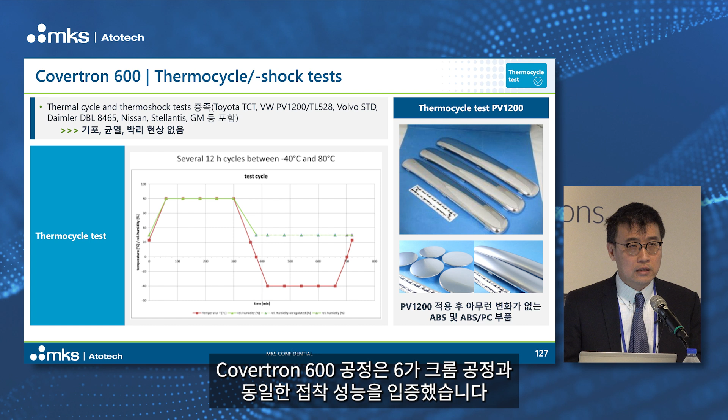The first question you will ask about performance is adhesion. We did a lot of tests on adhesion, like different thermal cycle or thermal shock tests according to different OEM specifications, such as Toyota TCT, Volkswagen PV1200, and various cyclic corrosion tests. We passed without delamination, without cracks, without blistering. All of this you can see in our slides, and it's proven that the adhesion is almost exactly the same, as good as the Chrome 6 application.

This is about compatibility with different plastic substrates, because many of our customers use different substrates in production, like ABS, ABS-PC, or even 2K, 3K materials. We have been testing this for almost a few years and created a database of different substrates. I cannot say every substrate works with Covertron 600, but I think the compatibility is quite good, and we can use the same process for different substrates.

So it means that for ABS, ABS-PC, we need only one process. And I think that's very important for automotive application, because most of the substrate that we are using today is ABS or ABS-PC with different content, with different PC content. So this process, Covertron 600, is able to plate different substrate with one process.

And also we have pilot lines in Germany and in China that will be able to help you really test your substrate to prove that it's working with our process.

This is a production process which is already working for many of our customers. In the past few years, we have installed more than 20 customers with Covertron 600. A few of them are in real production, not testing phase, but real production. That means every day 100, 150 liters.

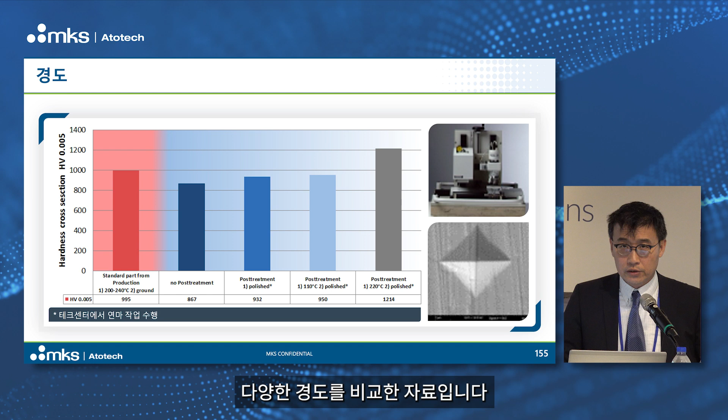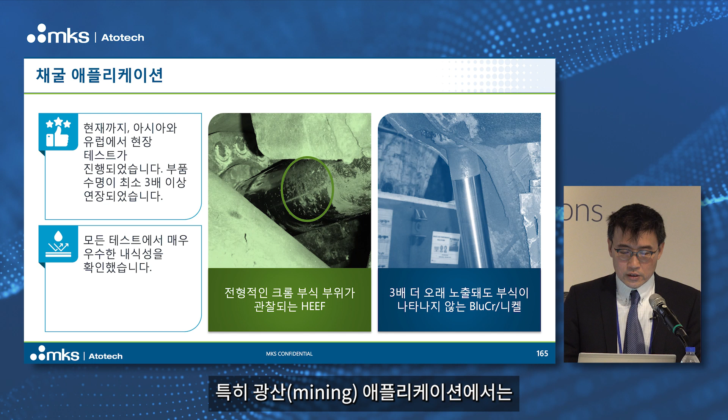We already have some applications and real industrial examples testing our BluCr. For mining applications, because of the better corrosion performance, the test shows that using BluCr with nickel really gives better corrosion resistance in real industrial application.

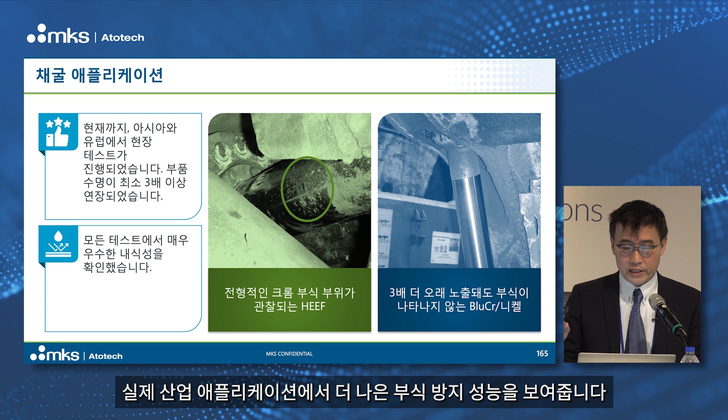You can see we are plating different parts with BluCr, with different geometry and different applications, and it all works. The challenge for different geometry in functional Chrome is there, and we see a great variety of parts to be plated. We've done a lot of sample platings already, which proved the process is working for different substrates and geometries.

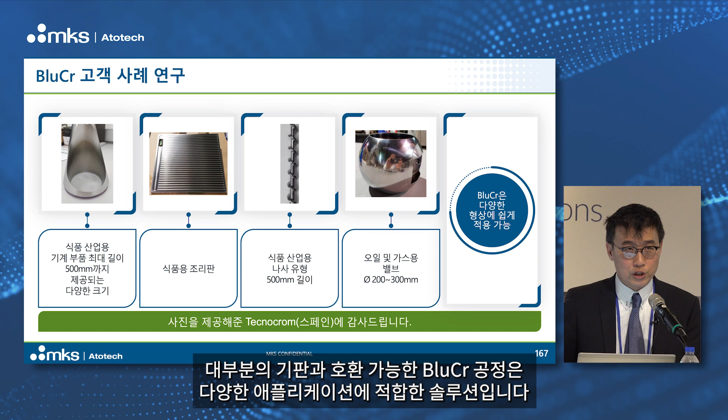That's the BluCr process, which is compatible with most substrates and different applications. We are using this BluCr in different parts, like hydraulic parts, and we already have some customers in production. We also have different standard automotive parts like brake pistons, piston rings, and engine valves—those are all applications for the BluCr chemistry.

We have different applications where general wear and corrosion requirements are needed, and especially we emphasize the high chloride containing environment, where compared to traditional hex Chrome it's outperforming. This is an example application with an engine valve, which is normally a high current density application for Chrome 6 plating, and we're able to outperform Chrome 6 with BluCr.

I'm not going into details because of time, but we can use the Q&A section, or discuss in detail later if needed.

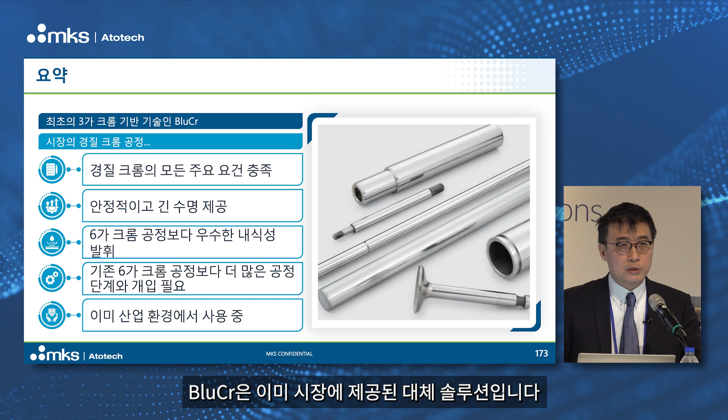As a summary, BluCr is again a production-proven process, which is available in the market as a replacement for Chromium 6 application, and it's stable. It can offer really similar performance compared to hard Chrome application, and can even offer better corrosion resistance in some special applications. So this is a replacement already in the market for you, and that's the summary.

Non-PFAS application. So the next topic is about non-PFAS application. PFAS is used in a traditional Chrome 6 process for functional Chrome, for Deco POP. It's a kind of forever chemical which will not decompose in the environment, and it's proven to be dangerous and toxic to human beings.

So there's regulation coming in different regions to ban this substance, and we have different alternatives for you, like WA POP etching for plastic, and also wetting agent 100 for decorative hexavalent chrome applications. This is a two-component system which consists of two chemicals.

One of them is to form the foam blanket, and the other one is the height controller. You can use these two products to really form, on the right hand side you can see in the picture, a very uniform dense foam layer on top of the hexavalent chrome process.

Because of time, let me go straight to the point. I think the next topic is really the CO2 emission or CO2 footprint for our industry. We did some analysis, and I want to show you the data. I think how important CO2 is to our market, to the OEM, I don't need to repeat that. This is very important to show.

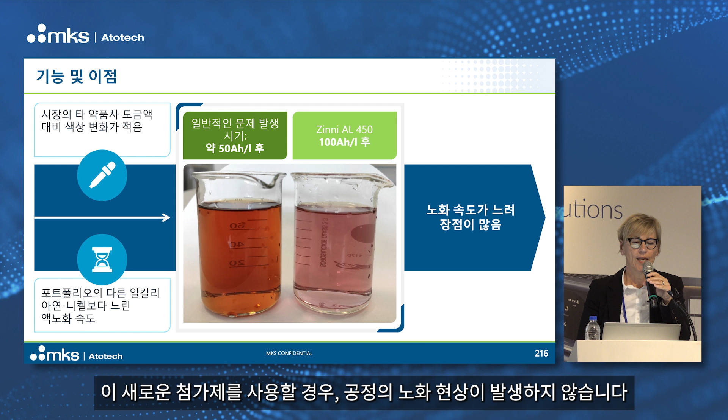The first thing we look at here will be a zinc nickel process which is already production proven, but still new. It's Zinni AL 450, some of you may know it, and we have developed new additive concepts. With these new additives, you will not see this aging - the electrolyte stays much longer, with less aging, on a new level as a new electrolyte.

You see even in this simple comparison, after 100 ampere hours per liter, this is looking much better than the other original electrolytes available on the market after half of the time. So working on the concept of the additives helped a lot, and you will see also what additional advantages that has.

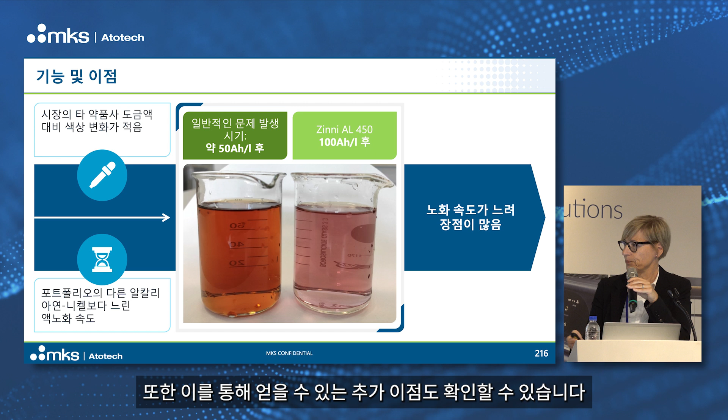With this electrolyte and this new carrier system, you can even plate parts with very dense holes, and of course these are barrel parts, also possible with very much filled barrels. I know these parts are done in a really huge barrel application, and they are very homogeneously plated. Despite that, with this very good throwing power, you can also have a very good plating speed.

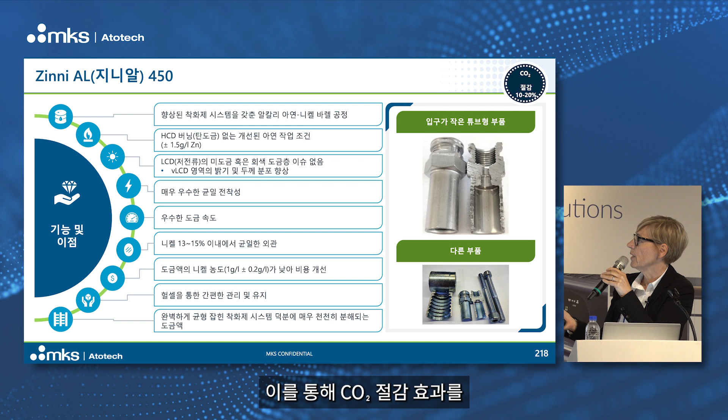This can be very interesting, because just by choosing the right electrolyte you already have a lot of advantages, and you will pay in for a CO2 saving of around 10 to 20% just with the change of the electrolyte.

We have seen a solution which is fast and efficient, and let's now look at a solution that can be even more or less wastewater free. Harald Arnert already gave a small glimpse of this morning.

We are talking here about our CMA closed loop, which is really a winning technology for all of you. This could be very interesting. This is really, like we say, closed loop. So the system is self-contained and it is working really in recycling also the nickel waste and the wastewater at all. So it is also an opportunity when we have limitations in availability of water on your side. And you can imagine in some areas where we have really dry environments, that is absolutely interesting.

The CO2 saving with this solution, when we are recycling the water, can be up to 45%. This is in regards of CO2 saving and the tough requirements which are coming up all over the world, and in the beginning now mainly the European Union is driving that. Of course, it is an important point, 45%.

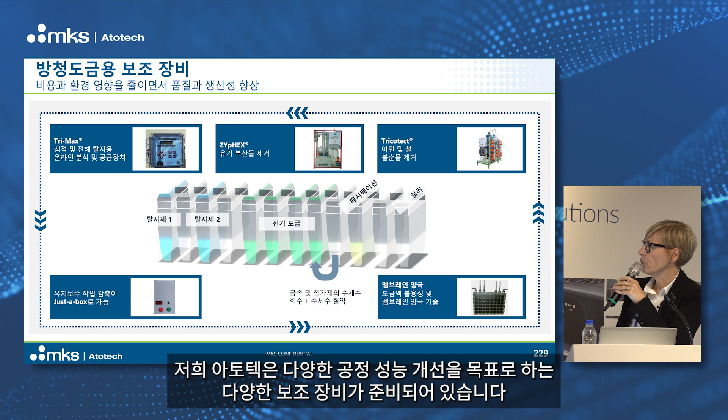But at the end, this concept of having auxiliary equipment to improve process performance, to enhance lifetime, to have more efficiency or stable quality performance, ensures being able to deliver high quality expectations for the automotive industry. We have a lot of auxiliary equipment available, a full portfolio targeting, for example, pre-treatment like Tri-Max, or also Tricotect for the passivation. So there is a full portfolio for whatever kind of applications you may have.

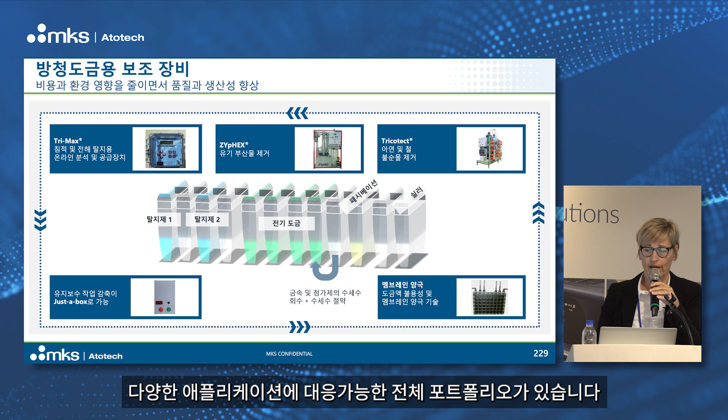And as you can see on the next slide, with this additional auxiliary equipment, you can also find for every one of your process steps and for every kind of your application possible CO2 savings. And of course, that is always related to your line and needs to be evaluated. But I believe there is, for every line, a lot of potential going step-wise and really analyzing what to save. So please contact our colleagues, contact our team, and together we can really make this turnaround for CO2 and towards an improved environment. With this, let us have a short glimpse also into zinc flakes and zinc flake coatings.

As you know, for zinc flakes, one very significant factor is energy costs, and we all are suffering that. Energy costs in the last years were really doubling, tripling, going up. So where can we save energy in a zinc flake process?

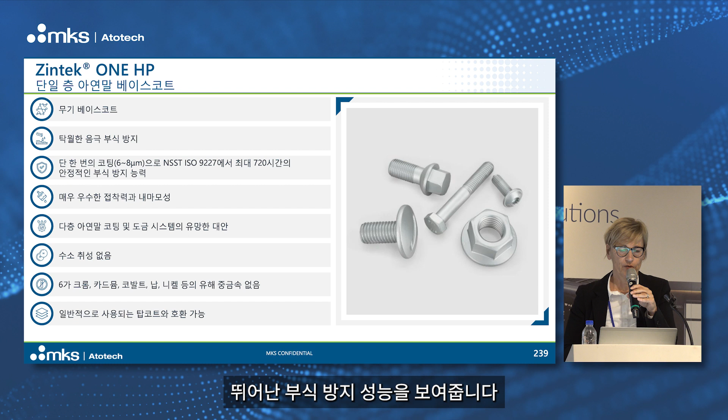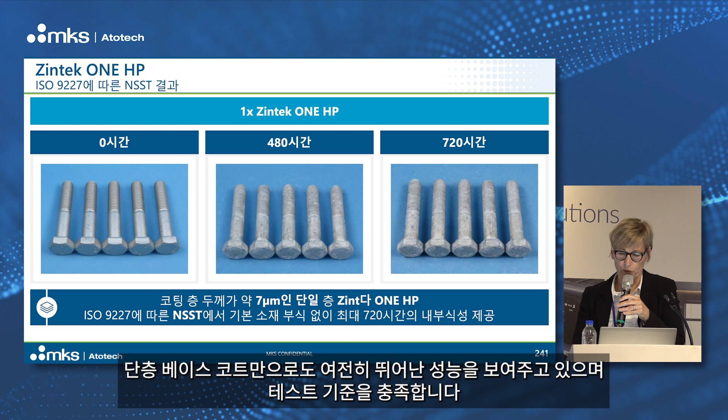You can already achieve very nice corrosion performance with this base layer. On the next page, the example shows after 720 hours, only one layer base coat, still performing well and fulfilling this test. And this is coming out of a normal industrial size centrifuge, so it's not a lab part.

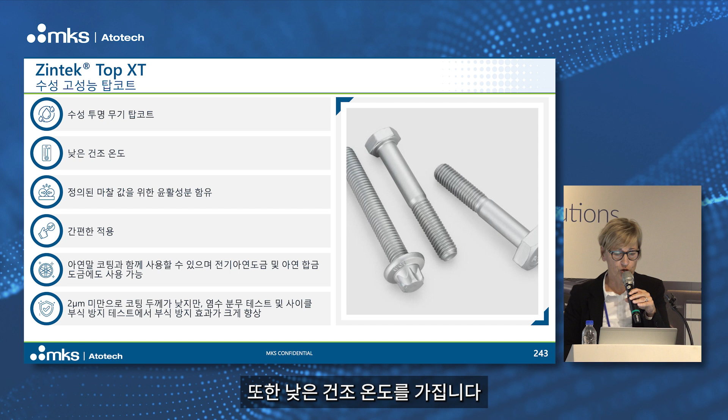Of course, if you have only one layer base coat and want a very high performance system, you should also have a high-performing top coat, and this is our Zintek Top XT. It's a water-based, transparent, inorganic top coat with a low drying temperature. We're talking about drying for 15 to 40 minutes at 120 to 180 degrees, so much lower and really thin.

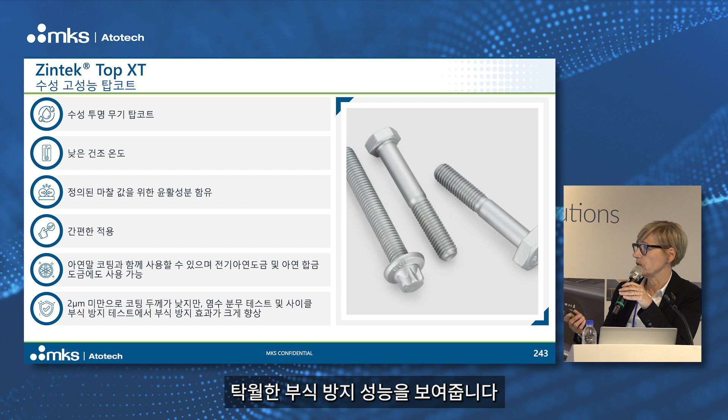But despite being very thin, we'll see in the example it has excellent corrosion performance. We're sharing just some examples, and to save time I'll go fast, but you can believe the corrosion performance is very good, not only in neutral salt spray test but also in cyclic performance.

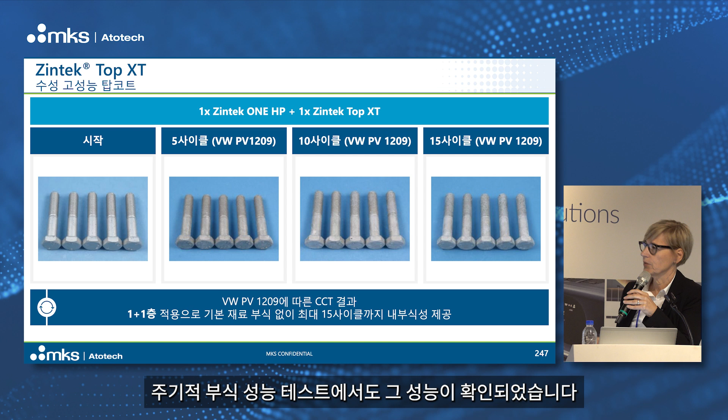What we've seen before is for dip spin application, a normal fastener dip spin application for example. And of course also for spray applications, you can do a lot in reducing the baking or drying temperatures, and that will always pay into coating cost reduction, energy consumption cost, and of course CO2 emission.

We have developed a new family of products under our X-Link family name, which helps trigger the reaction between the polymer and the polymer chain at lower temperatures, even at ambient temperatures. On one hand, you can use that with a normal top coat, which is a kind of our top coats.

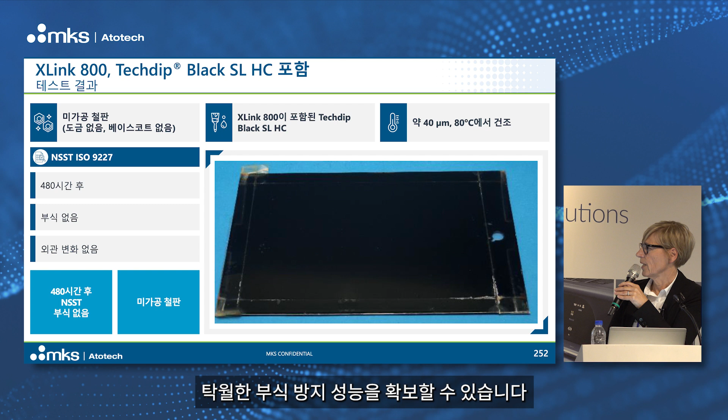Here you will see reduced temperatures, only dried at 80 degrees. So even with these low temperatures, you can get excellent corrosion performance. And if you use this X-Link concept with our usual Zintek Top XT market-leading product, then of course you can also expect excellent corrosion performance.

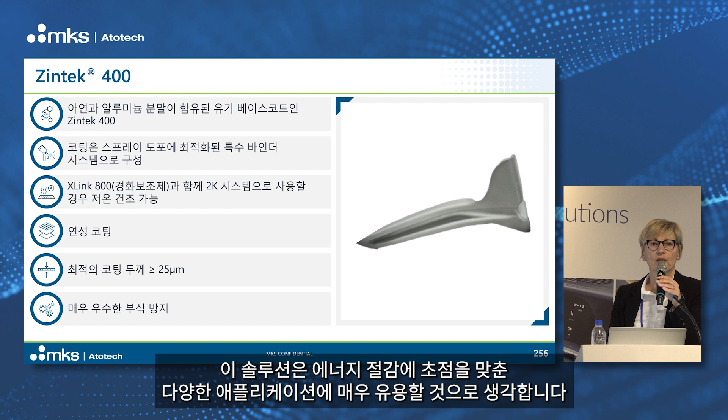And even with our Zintek 400, which is organic based and zinc plus aluminium, so also high-performance corrosion protection, you can use this X-Link as an additional cross-linker in a 2K system, and then even at ambient temperature you can get excellent corrosion performance with a ductile coating. I think this could be very interesting for applications when thinking about energy saving.

So with that, let me come to the end. I think we saw that there is a lot of potential in CO2 saving. You need to look into the details. You need to understand what are the starting points for your evaluations and for CO2 saving.

We would like to start your thinking about that. This should be just an appetizer, what we presented here. I hope we can come into closer discussion, maybe during lunch or later on with the teams in the next weeks to come. And we would like to invite you to start your journey in CO2 saving with your application and your projects.